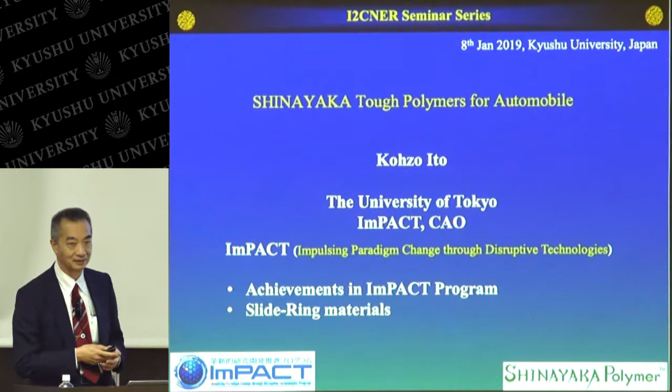Today, let me talk about mainly two topics. One is some achievements in the Impact program, and the other is about slide-ring materials, which are used in some parts of projects within the Impact program. First, I'd like to talk about the overview of the achievements in the Impact program, then focus on one key technology in the program: slide-ring materials.

I'd like to introduce what the Impact program is. The Council for Science, Technology and Innovation, Cabinet Office, Government of Japan, which is the headquarters of Japanese science and technology, started the Impulsing Paradigm Change through Disruptive Technology Impact Program in 2014. They selected about 16 program managers from Japan, aiming at a new system that, if realized, will create a disruptive innovation that brings about a change in society.

Each program manager is allowed to use about a 30 to 50 million dollar budget, almost freely, so their targets differ. My target is creating new tough polymers for automobiles. For example, another professor is focusing on spider silk creation, and others are developing robots or similar technologies.

My target is polymers. Implementation of composites is moving from planes to automobiles, as you know well. Plane bodies have been made of metals such as duralumin, but recently the body has changed from metal to composite, CFRP composite and glass fiber composite. This trend is proceeding to automobiles recently or in the near future. Then the automobile weight is drastically reduced by about half, which means double the fuel efficiency. This creates a very drastic change in society.

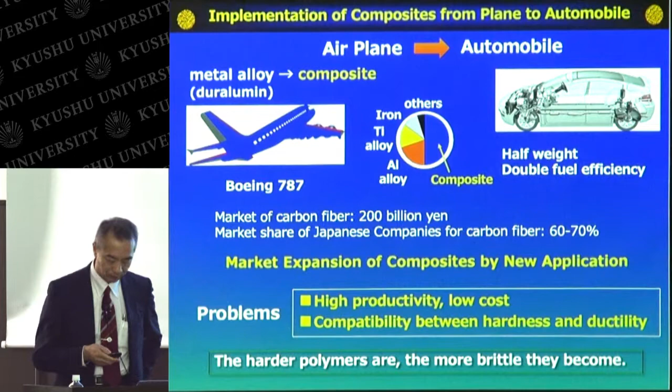So the market expansion of composites is driven by these new applications. But there are serious problems when we use composites for automobiles: high productivity and cost issues. From the scientific view, the compatibility between hardness and ductility is another very serious problem in polymeric materials. Generally speaking, the harder polymers are, the more brittle they become. This is a serious essential problem in polymeric materials.

To solve this problem, I started a new Impact program. We integrate cutting-edge facilities and advanced chemistry. We developed SHINAYAKA polymers, which means flexibility, ductility and toughness, based on a novel molecular concept to strengthen polymers. The initial target was to create prototypes of each component for automobiles, and establish guidelines for toughening polymers.

We started with these 5 projects: vehicle body resins, toughening vehicle body resins, and reducing the thickness of tires. We also wanted to develop new tough transparent resins, and reduced the thickness of fuel cell membranes and lithium-ion battery separators.

But in the middle of the project, we increased the target to create a real concept car using these newly developed polymeric materials, so we could realize lightness and safety by applying SHINAYAKA polymers to vehicles.

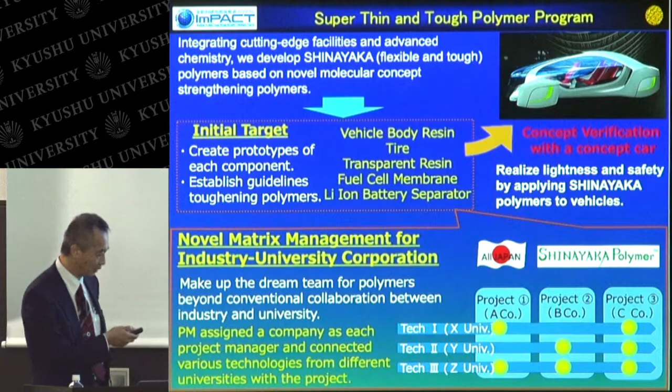And finally, we developed a new kind of tough polymers in a different area, used for automobiles. So to achieve the target, I invited distinguished professors in the field of polymer chemistry from Japan.

Professor Gong at Hokkaido University, Professor Aida at Tokyo University and Riken, Professor Harada at Osaka University, and Professor Otsuka from Tokyo Institute of Technology. We asked them to provide new ideas to create tough polymers by new chemical bonding.

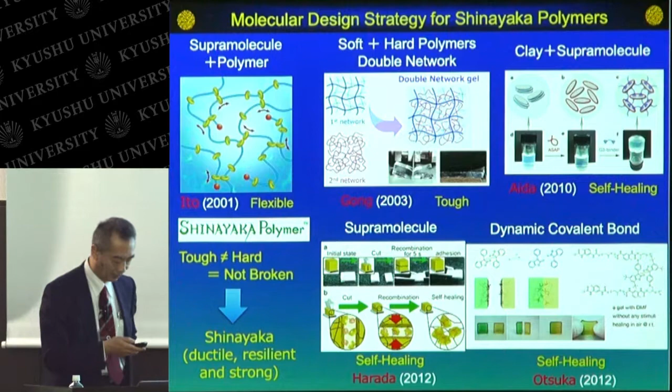Or new functional materials. And also, I asked other leading, distinguished professors in the fields of polymer physics, theory and simulation, and processing to join. For example, Professor Okumura, Professor Umeno, Professor Urayama, Professor Gong, Professor Hiroshi Ito at Yamagata University, Professor Keiji Tanaka at Kyushu University, Professor Nakajima, Professor Takata, Professor Takahara at Kyushu University, Professor Jinnai, and Professor Okazaki.

And I asked Professor Takahara to take leadership of these professors to support the development of the companies.

And we are allowed to use synchrotron radiation facilities, and also the supercomputer K, to clarify the molecular mechanism of polymer fracture. We focus on higher order structures such as crystallization, phase separation, cross-linking, and composites to create new tough polymers for automobiles.

But the main players in my project are companies. Five major chemical companies joined my project. Toray's target is to strengthen vehicle body structure resins, and Sumitomo Chemical's target is to create tough transparent resin using PMMA.

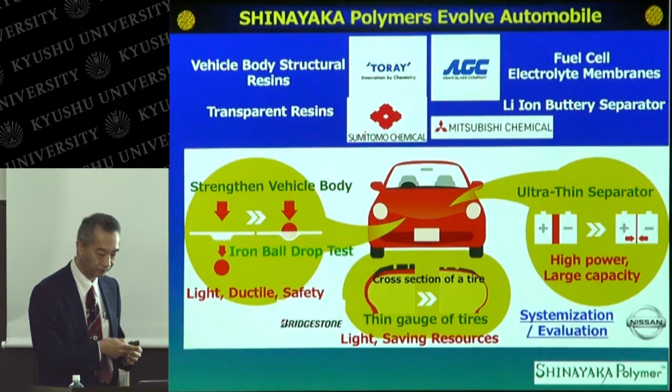I'd like to introduce the achievements from these companies mainly today. First of all, I'd like to introduce the achievement from Toray.

You know elongation to break and hardness have a trade-off relation. The harder the polymers are, the more brittle they become. So to improve mechanical properties, we usually add some rubber particles. Then the elongation to break is increased. However, such materials show lower Young's modulus.

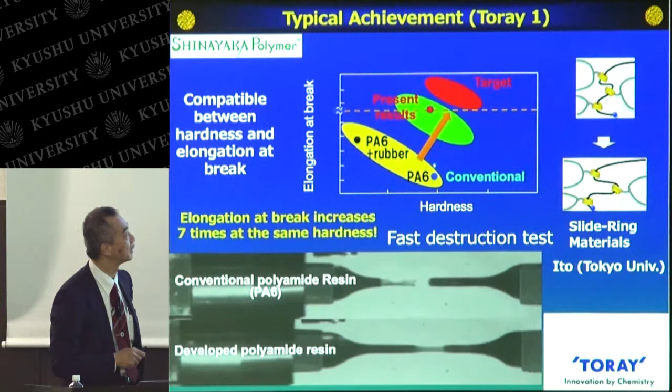But Toray used slide-ring materials, like polyrotaxane, and achieved an increase in elongation to break of about 7 times, at almost the same hardness.

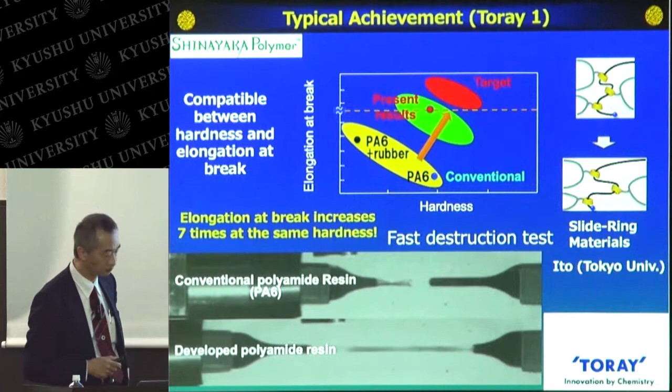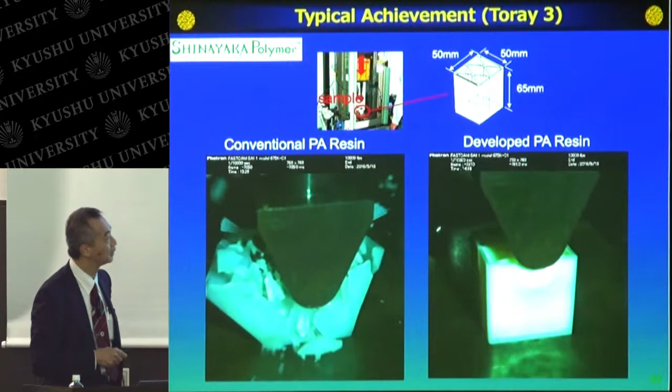Then the iron drop test results are completely different. Usually polyamide resin is brittle like this, but the developed polyamide resin does not collapse when they add only 5% of polyrotaxane.

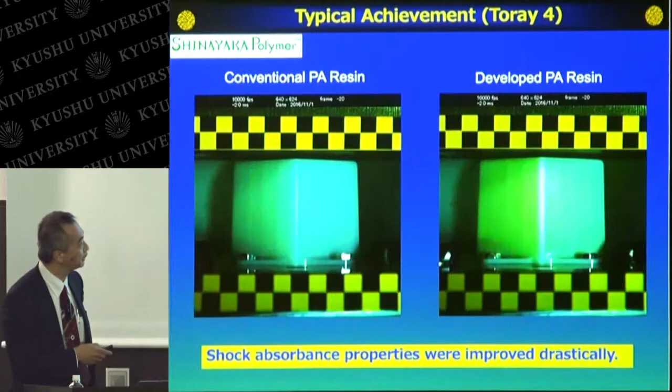This technology is effective as a composite too. These two polyamide resins have about 30% glass fibers. The conventional polyamide resin composite becomes more brittle, but you can see this newly developed polyamide resin does not collapse like this.

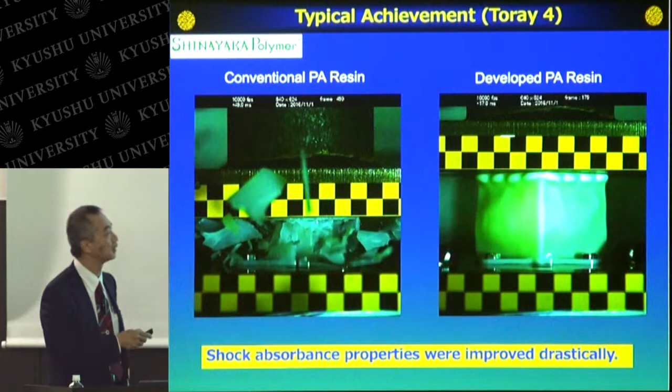Now let me show you the next achievement, from Bridgestone. They focus on crack propagation. When the rubber is stretched very weakly, the crack propagates very slowly.

But when you stretch the rubber stronger, the crack propagates very fast. The speed is increased about 10,000 times. This is called the crack propagation transition. So there is some threshold between the slow mode and the fast mode.

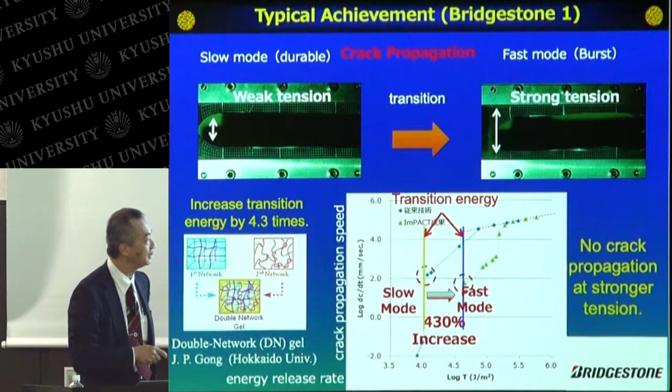So Bridgestone tried to increase the threshold transition energy to a higher energy area. They finally used the concept of double network gel from Professor Gong at Hokkaido University, and increased the transition energy about 4.3 times, so no crack propagation occurs even at stronger tension.

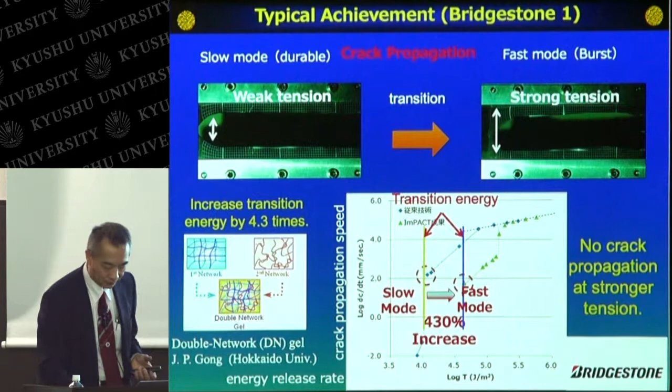This shows the results. This rubber is the standard one, and this is the developed one.

You can see that this rubber is stretched the same way, and the rubber is cut. The end of the rubber is cut with scissors. In this rubber, you can see the crack propagate very, very fast. But in this one, the crack is not propagated faster—very, very slowly propagated. But these two rubbers show almost the same stress-strain curve, yet the crack propagation is quite different from each other.

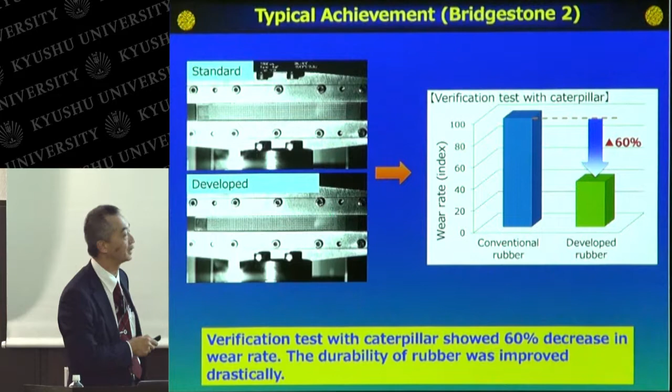So they performed a verification test with a rubber caterpillar. The rubber caterpillar has usual rubber on one side, and the other side is a developed rubber. Then the wear rate is decreased about 60% when they use the developed rubber. So then they can reduce the thickness of the tire by using these developed rubbers.

Next, I'd like to show you another achievement from Sumitomo Chemicals. They tried to develop a transparent resin for car roofs. When the car roof is replaced with a transparent resin, the weight is reduced about 40% compared to metal and 60% compared to glass.

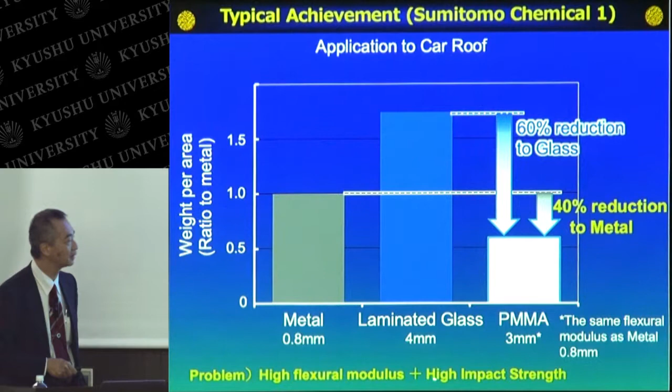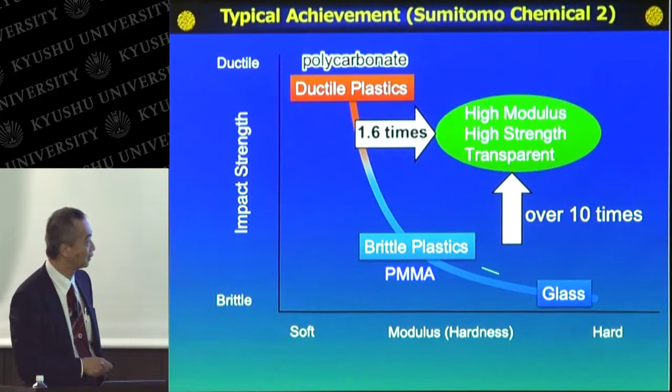But they developed a new process technology. They adopted this new process technology and increased impact strength by over 10 times—non-break. And at the same time, they increased the hardness of PMMA about 1.6 times. So they successfully broke through this trade-off line.

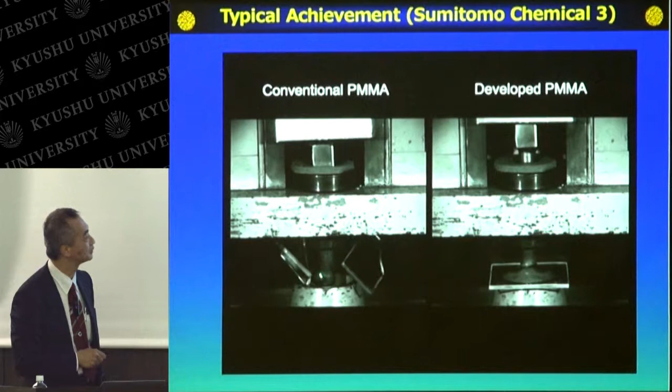This shows the iron drop test. The usual PMMA is brittle like this, but the developed PMMA is not broken by this drop test. Next, I'd like to show you the achievement from AGC.

AGC's target is a thinning electrolyte membrane for fuel cell batteries. Their target is to reduce the thickness from the conventional 25 micrometers to 5 micrometers—a reduction to about 1/5. Such reduction decreases the membrane resistance, which increases cell power and cell efficiency, and also enhances water mobility, realizing a uniform humid condition in the cells. Finally, such a thinner membrane realizes a smaller, lower-cost next-generation fuel cell battery system.

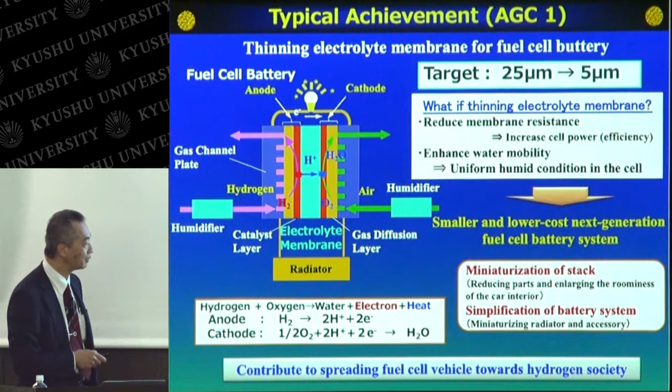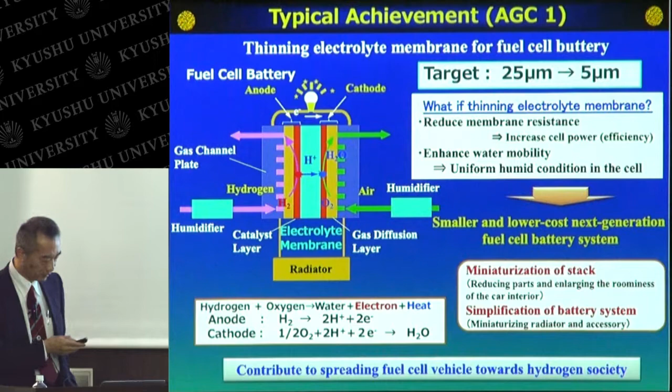But the problem is, when we reduce the thickness of the membrane, such a thin membrane is easily broken. So they collaborated with many universities joining an impact program, and I'd like to introduce only one collaboration because of the limit of time.

They collaborated with Yamagata University very closely, and they found a wet-dry cycle index. Usually, the durability of the membrane is tested with the wet-dry cycle test, which takes a very, very long time to check the durability of such fuel cell battery membranes.

But they found a very good index closely related to this dry-wet cycle durability, through the collaboration with Yamagata University. This index consists of 4 factors: Factor A is the fracture energy, Factor B is the stress dispersion, Factor C is the volume change in swelling, and Factor D is the puncture resistance test, or creep test. They combined these tests and obtained this new wet-dry cycle index.

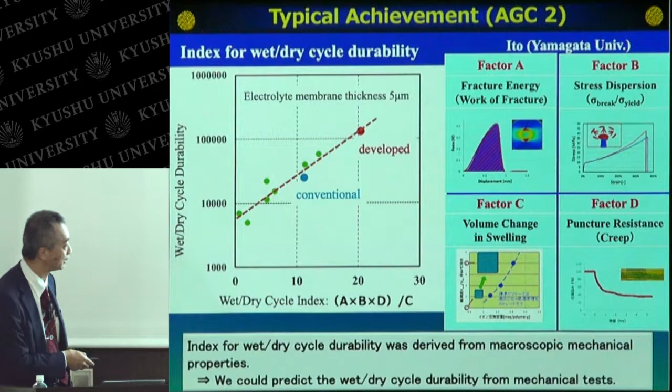After that, they can accelerate the development speed of the new tough fuel cell battery membrane. So this shows the result.

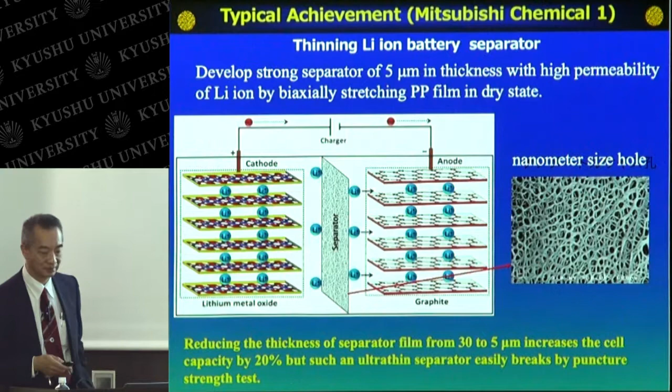But usually, such an ultra-thin separator easily breaks in the puncture strength test. So they collaborated with Professor Kawai at Gunma University, and they used the SPring-8 beamline. Our program can use this beamline almost freely.

Professor Kawai and Mitsubishi Chemical clarified the mechanism of void forming in the polypropylene resin films. Finally, they obtained a guideline to create very uniform nanovoids, and to control the hole size and distribution.

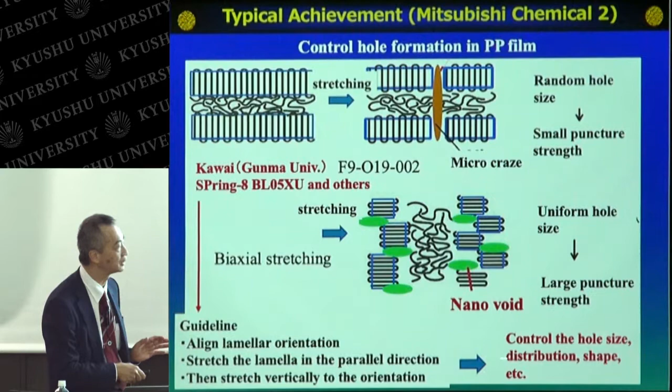First, they aligned the lamella orientation in the polypropylene film, and stretched the lamella in the parallel direction first, then stretched vertically to the lamella orientation direction. Then they could obtain voids or nano holes in the polypropylene resin, and finally control the hole size, distribution, and shape.

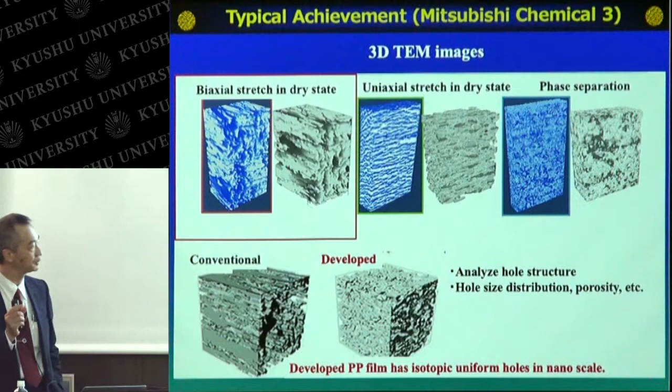But the developed membrane shows very uniform nano holes with isotropic orientation, and the distribution is very narrow. As a result, the mechanical property is improved drastically.

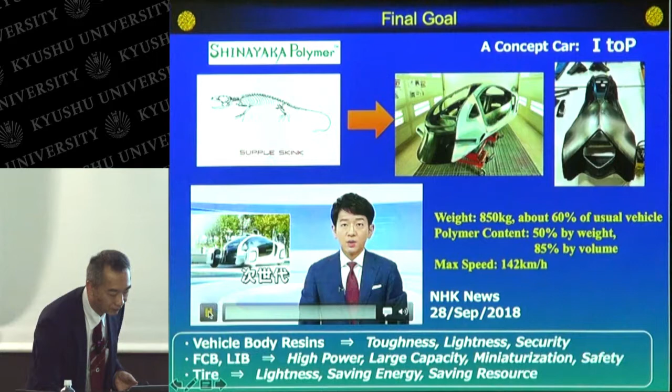This was introduced by NHK News on the 28th of September last year. The weight is about 850 kilograms, about 60% of the usual vehicle.

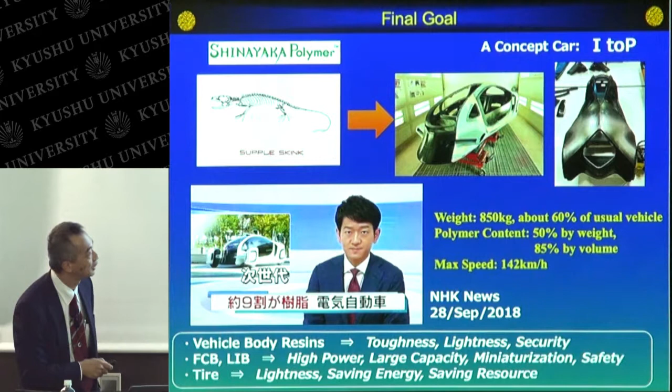The car has about 50% plastics by weight and about 85% by volume.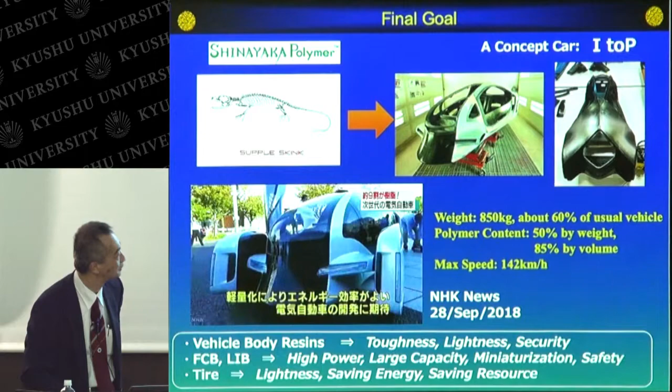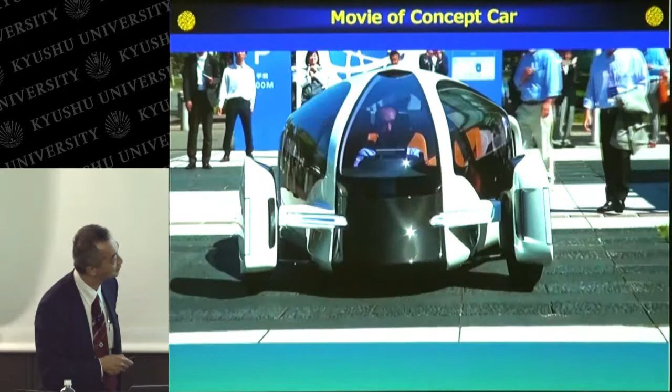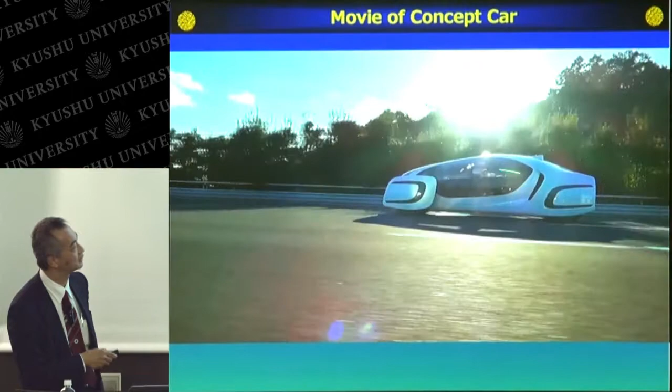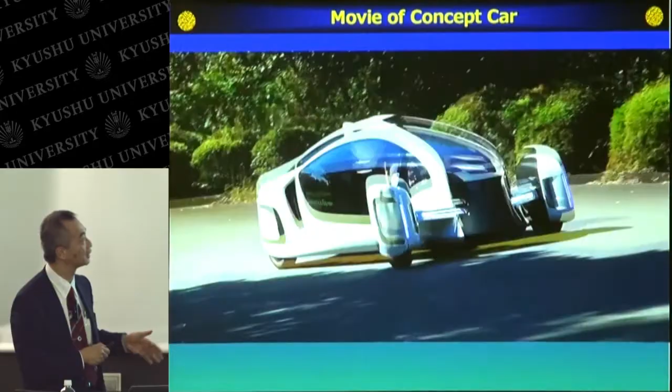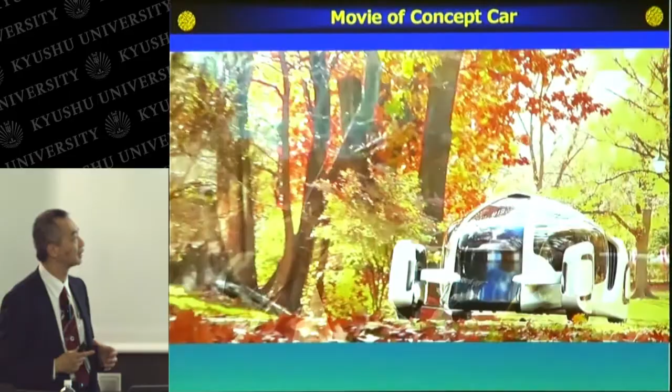For example, the developed transparent resin is used in the back door of this car, and the monocoque frame of this concept car is partly made of new SHINAYAKA materials.

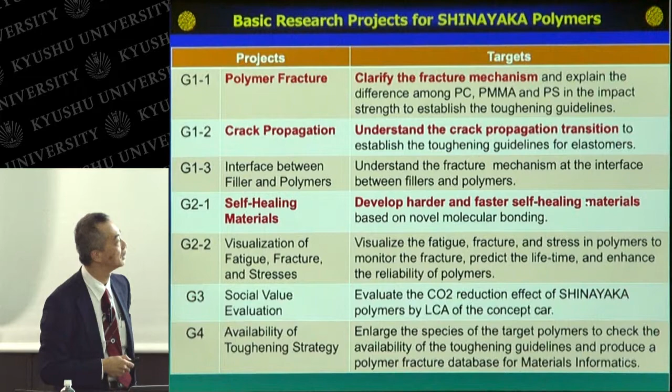We also try to understand the crack propagation transition to establish toughening guidelines for elastomers, and we successfully developed new self-healing materials with harder and faster self-healing properties. I'd like to show you such achievements from academia.

So we try to clarify the molecular mechanism of why this transition occurs in polymeric materials. And we successfully found the density fluctuation by the small angle scattering under elongation.

This work is mainly performed by Yamagata University. They simultaneously measured the X-ray scattering and stress-strain curve in the specimens at the same time. And they found this density fluctuation is important to understand the molecular mechanism of the fracture.

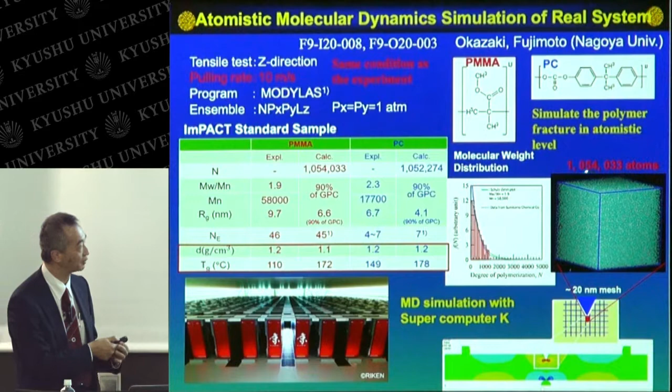And in this simulation, they realized the difference in fracture behavior between polycarbonate and PMMA. Polycarbonate is a ductile, transparent resin, while PMMA is a brittle resin. From these simulations, they obtained the essential reason for the polymer fracture difference between ductile and brittle polymer resins.

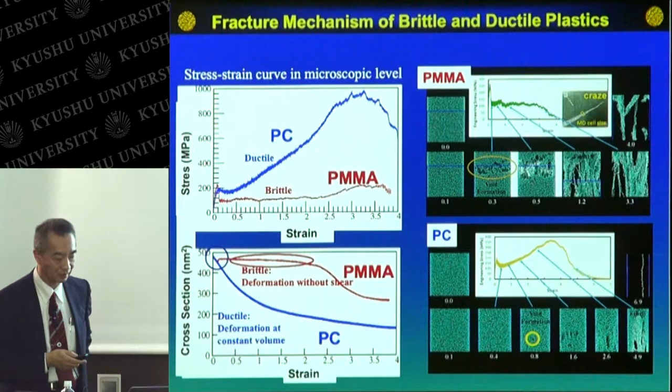So we tried to understand the transition mechanism of crack propagation. Professor Okumura at Ochanomizu University found the exact solution of the three-factor model realizing the crack propagation transition. This is the first finding of an exact solution in the field of crack propagation.

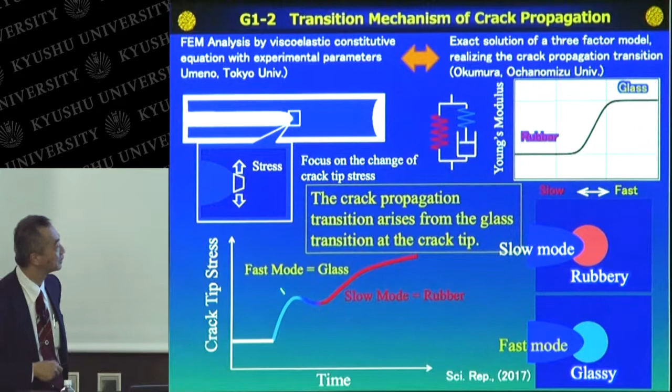Also Professor Umeno at Tokyo University performed FEM analysis using a viscoelastic constitutive equation with experimental parameters. Finally, the crack propagation transition arises from the glass transition at the crack tips. This finding led to the development of a very thin, tough tire by Bridgestone.

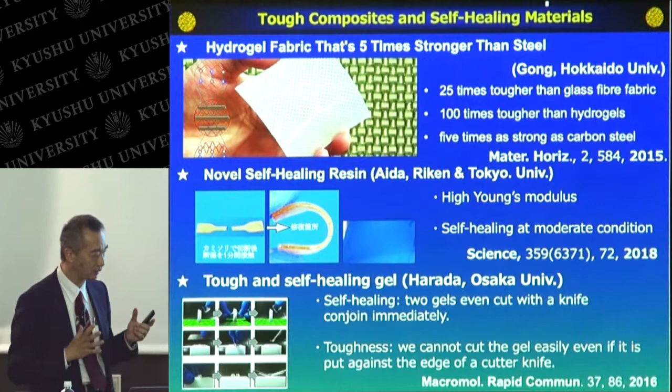So in the field of self-healing resin, our project developed new kinds of harder and faster self-healing materials. I'd like to introduce one example by Professor Aida at the University of Tokyo. They developed a very hard self-healing resin.

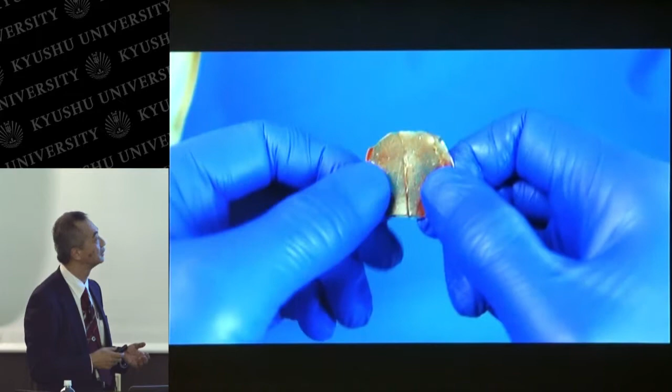This is very hard, almost like 1 gigapascal, similar level to usual glasses. But this self-healing resin heals itself very fast, like this. You can see that this resin is almost self-healed in about 4 or 5 minutes or so. So it's almost self-healed.

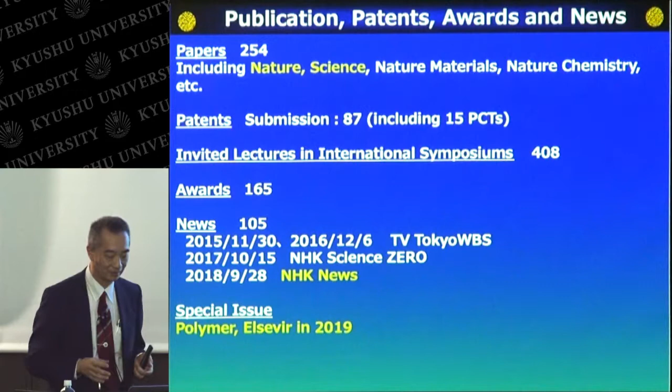They came to take movies of the concept car. I think this movie will be broadcasted this evening, so if you have a chance, please watch that news this evening.

Okay, now let me talk about slide-ring materials, the next topic. In my project, some companies successfully use slide-ring materials to improve mechanical properties, for example Toray. So slide-ring material is one of the key technologies in my program. I'd like to show you some recent results of the slide-ring materials.

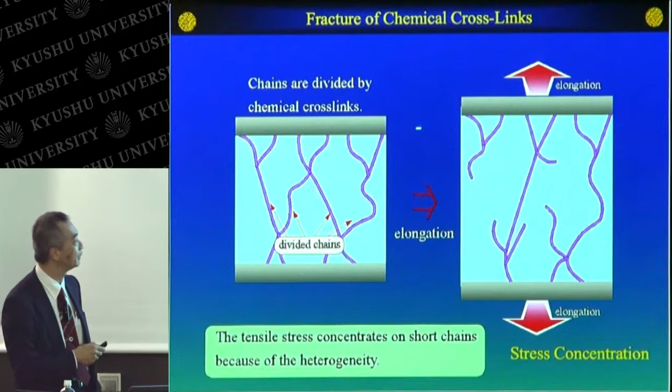Usually polymers are used by cross-linking, as you know well. There are two kinds of cross-linking: physical cross-linking and chemical cross-linking. Chemical cross-linking is more stable than physical cross-linking, but there are some drawbacks. The length between cross-linking points is not uniform, so under tensile deformation, tensile stress concentrates on the shorter chains, producing stress concentration.

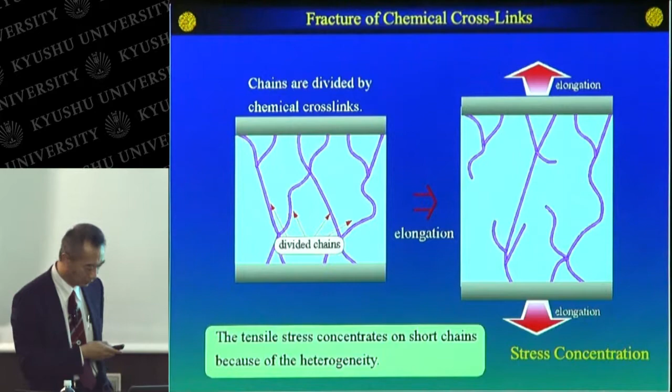To solve this problem, we use mechanically interlocked polymeric architectures such as catenane, rotaxane, and polyrotaxane. In my laboratory, we use this polyrotaxane. This mechanically interlocked system was awarded the Nobel Prize in Chemistry in 2016, as you know.

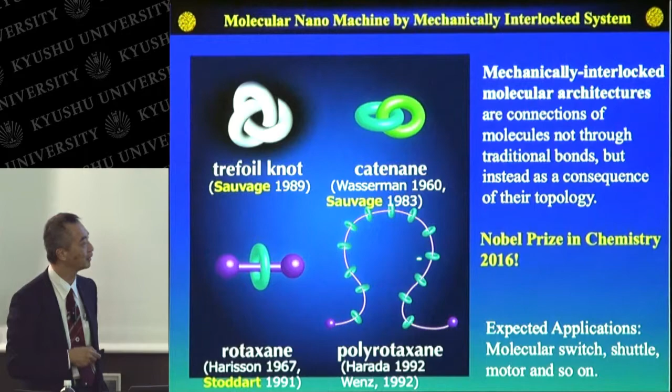These concepts are expected to be applied to molecular switches, molecular shuttles, and molecular machines. About 20 years ago, Professor Okumura, who is here, invented a new supramolecular network called slide-ring materials. He cross-linked cyclodextrin, cyclic molecules, in polyrotaxane to form figure-of-8 junctions, allowing large deformation while keeping the topology of the polymer network.

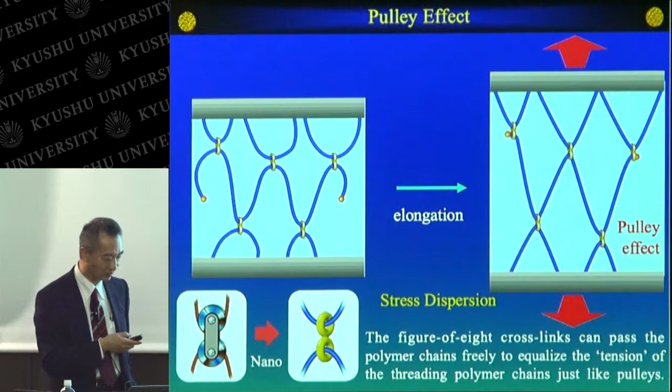In this case, under tensile deformation, stress is not concentrated on the shorter chains. The figure-of-8 junction can pass through the polymer chains freely to equalize tension, just like pulleys—we call this the pulley effect. Stress dispersion occurs automatically in the slide-ring materials, and another important property of these materials comes from the entropy of the rings.

Not all cyclic molecules are cross-linked in the slide-ring materials. There are many free rings remaining uncross-linked, and these free rings are distributed randomly before deformation. On the other hand, when the slide-ring material is stretched in this direction, the polymer chain deforms on short time scales.

Then the pulley effect starts to occur. What's important here is that the polymer chain can pass through the crossing point, but the free rings cannot. So the pulley effect yields a heterogeneous distribution of free rings after stretching, and the entropy of the rings is reduced drastically, yielding novel entropic elasticity.

This means that the topological asymmetry of rings and strings yields a dynamic coupling between the conformational entropy and the distribution entropy of rings, via the pulley effect in the slide-ring materials.

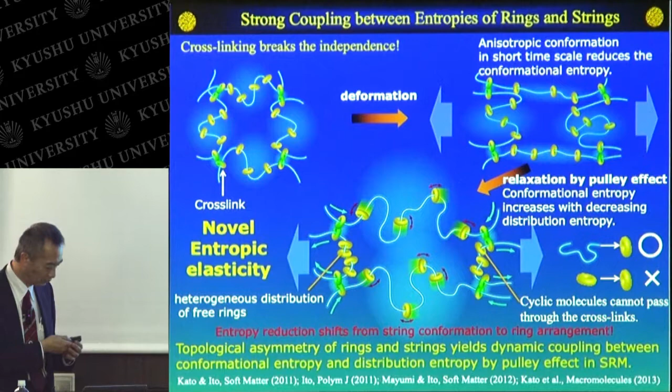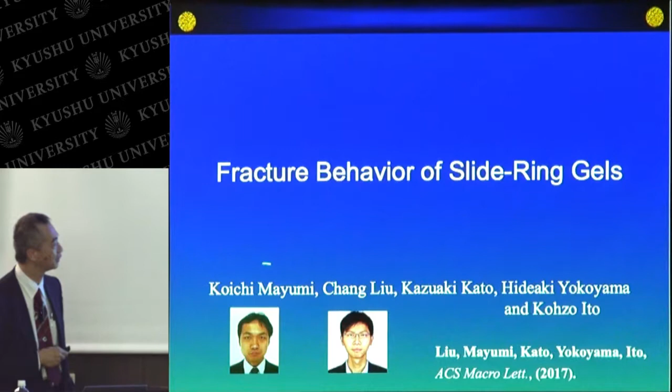I'd like to show you some recent results on the sliding motion of polymer chains and free rings in the slide-ring materials, and introduce the fracture behavior of slide-ring gels. This work was performed by Professor Kato, Dr. Mayumi, and Mr. Liu in my laboratory.

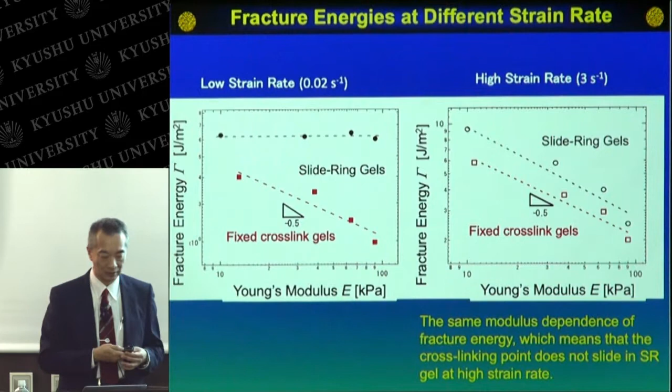This behavior can be explained by the sliding motion of the cross-linked point. At low strain rate, this sliding motion can catch up with the macroscopic deformation, which increases the fracture energy drastically. But at much higher strain rate, the sliding motion cannot catch up with the macroscopic deformation, so the slidable cross-linking cannot really slide within the polymer network.

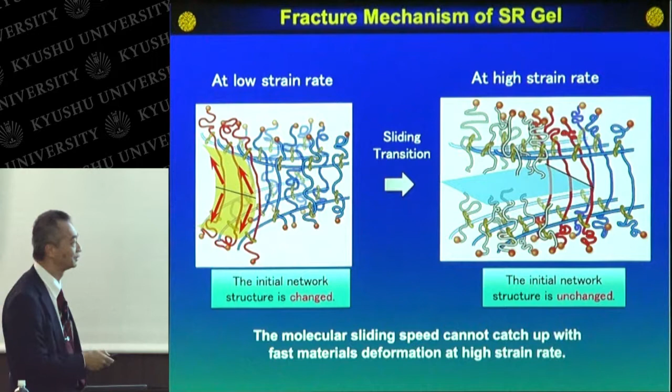So this sliding material shows almost the same brittleness, similar to usual chemical gels. This shows the strain rate dependence of the fracture energy: at low strain rate, the sliding gel shows higher fracture energy, but this is reduced drastically at higher strain rate.

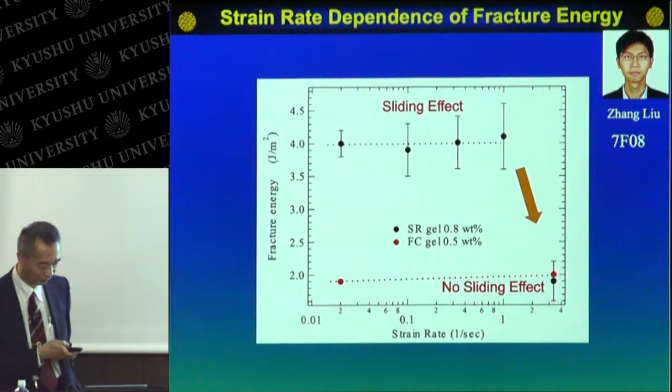Next, I'd like to show you some applications of sliding materials. Recently we collaborated with Professor Terashima at the University of Tokyo to develop thermally conductive, tough, flexible elastomers as composites of sliding materials and surface-modified boron nitride particles via plasma in solution. The surface of the boron nitride is modified using an aqua plasma system developed by Professor Terashima.

We combined the surface-modified boron nitride with the sliding materials and achieved composite materials that have good mechanical properties even with a large amount of boron nitride, up to 70 weight percent.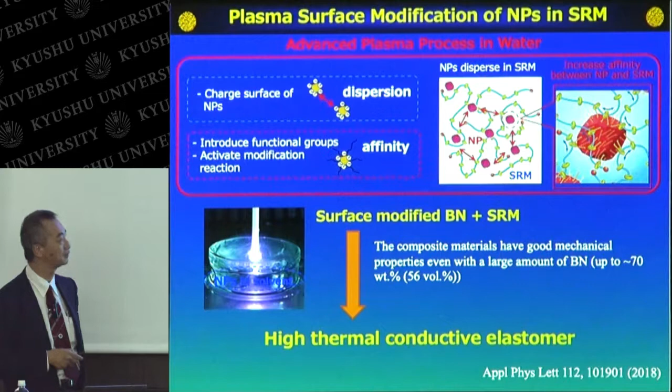This shows dependence of thermal conductivity on the Young's modulus. Higher thermal conductivity is achieved at high Young's modulus materials, such as silicon carbide or alumina or something like that. But we developed relatively high thermal conductivity elastomers at lower Young's modulus, and this level is almost the same as

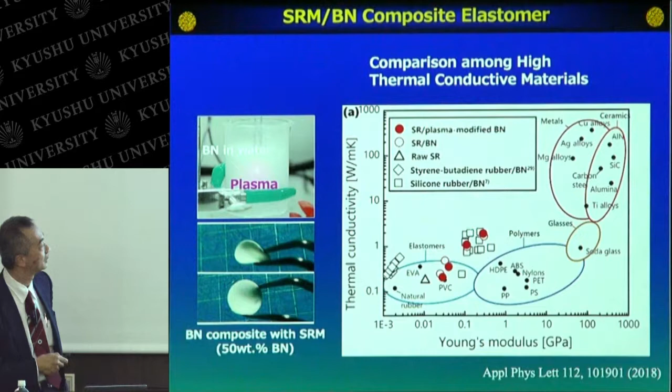silicone rubber boron nitride system, though the tensile strength is quite different. This red circle shows the tensile strength of the slide-ring materials, and this open square shows the results of usual silicone rubbers. So you can see the slide-ring rubber shows higher tensile strength compared to the usual silicone systems.

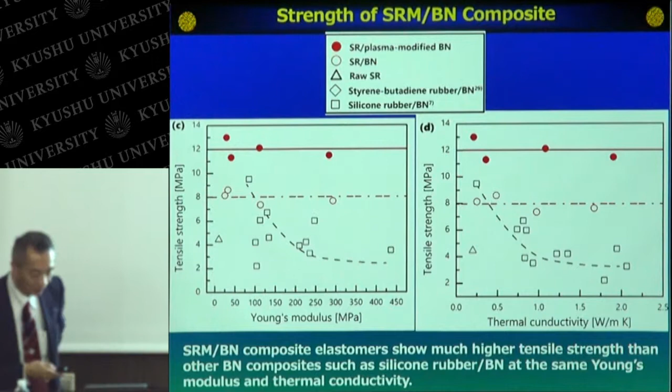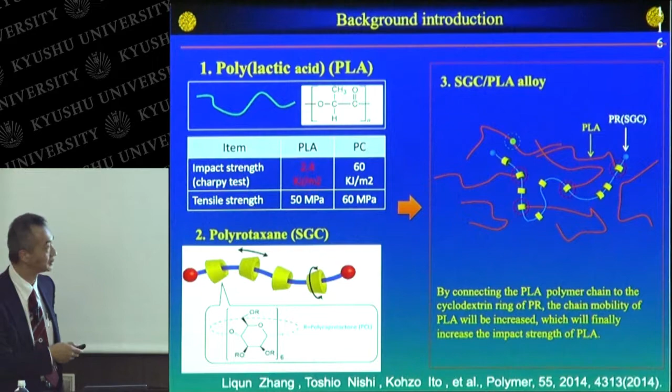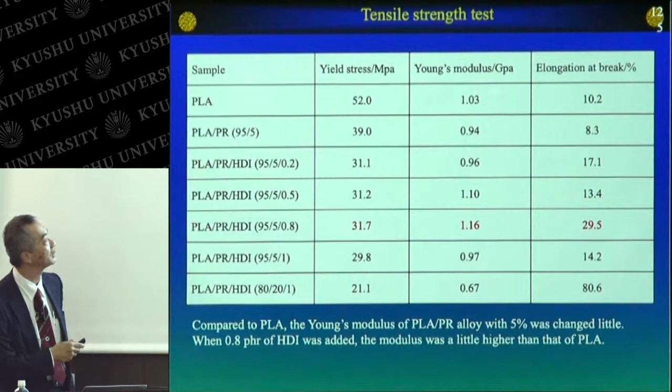I'd like to show you another result: improving the impact strength of polylactic acid by alloying with polyrotaxane. Polylactic acid is a biodegradable and bio-based polymer, which is very important and will be more important in the future. But its drawback is brittleness. To improve the mechanical property, we use a small amount of polyrotaxane. When we add only 5% polyrotaxane to the polylactic acid, the Young's modulus stays almost the same as polylactic acid without polyrotaxane, but the elongation at break is improved about 3 times.

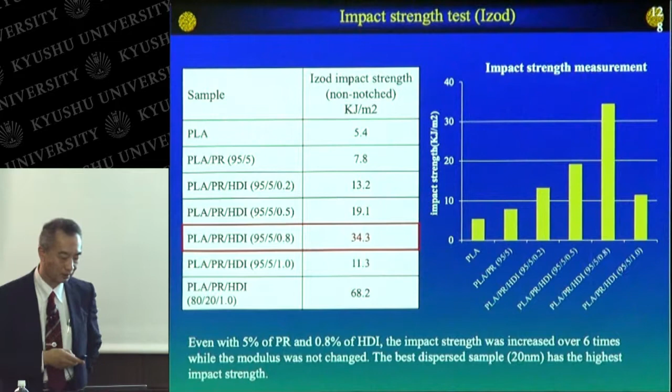This shows the impact strength test. You can see the impact strength is improved about 6 times compared to the neat polylactic acid.

Recently this polyrotaxane slide-ring material elastomer is used for the roll-type dielectric actuator from Toyoda Gosei. This actuator is now released commercially from Toyoda Gosei.

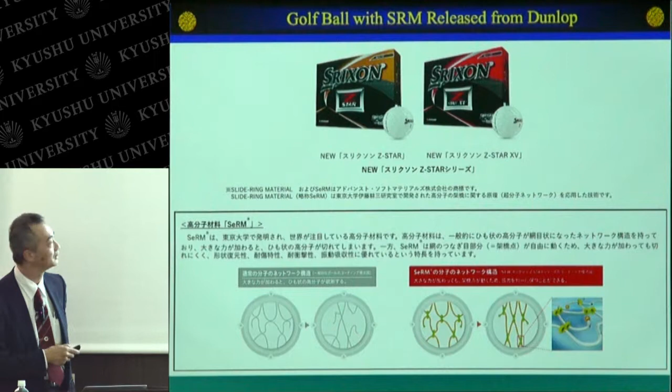And recently, the golf ball is released as Srixon by Dunlop. If you like golf, please try this new golf ball using polyrotaxane. It will be released, I think, next month.

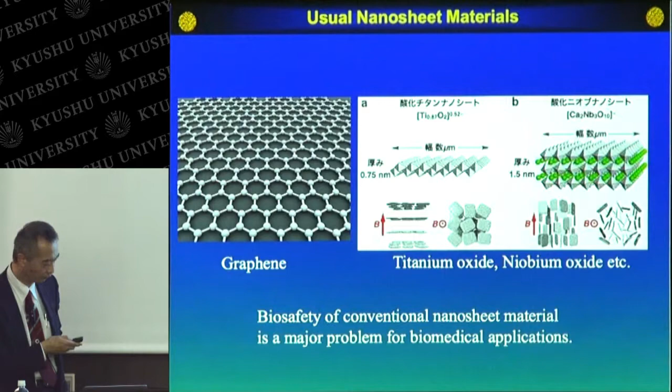Recently we use a new nanosheet based on the polyrotaxane system. We use this 3-block polymer having ionic carboxyl groups at both ends, and we mix this with beta-cyclodextrin in water. Then the beta-cyclodextrin forms an inclusion complex with only the polypropylene glycol component of the 3-block polymer. Then they self-assemble into a nanosheet—a very vibrant, very robust, simple system.

You can see that this nanosheet has a height of 16 nanometers. It's dispersed in water, and the size is about 1 or 2 micrometers. You can see this nanosheet has this shape. This shows the X-ray diffraction results of this nanosheet. It shows a monoclinic crystal structure, and it's very simple—a complete monocrystalline nanosheet.

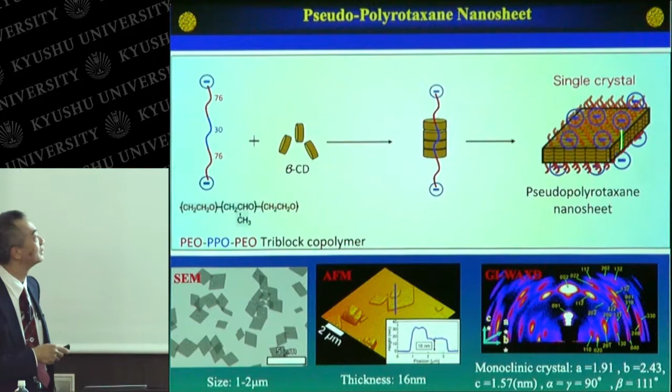Let me summarize my talk. These major chemical companies have developed SHINAYAKA polymers for automobiles in the Impact Program through close collaboration with distinguished professors in polymer chemistry, polymer physics, and polymer processing, and so on. And a concept car with the SHINAYAKA polymers has been constructed by Toray, called Carbon Magic.